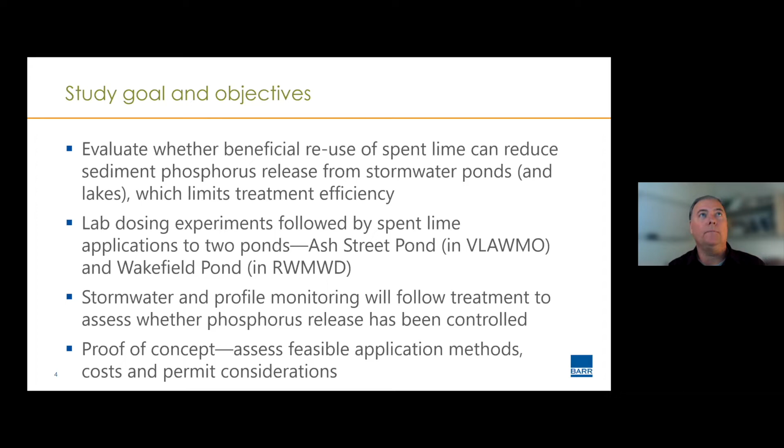So what is spent lime? Well, it actually comes in many different forms, depending on the facility you're talking about. There are several water utilities around the state using lime softening, and usually a byproduct of doing lime softening is that you get what's referred to as spent lime. So the residual after the water treatment process for lime softening results in some form of spent lime.

At their capacity, they're producing about 10,000 gallons of spent lime every day. Over the course of a year, that's about $1 million to truck this filter cake out to agricultural fields where it today is being used as a soil amendment. It would be beneficial in some cases if you needed pH adjustments in your soils. And so that does come with a cost. The water treatment residual has a cost to it in terms of its disposal or some other reuse that would come into play.

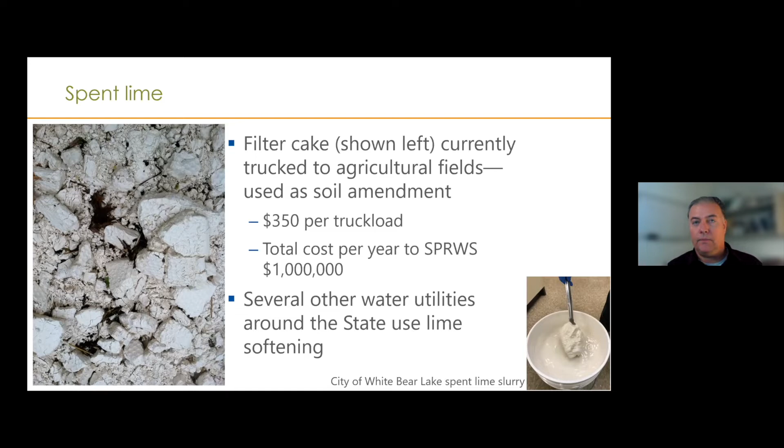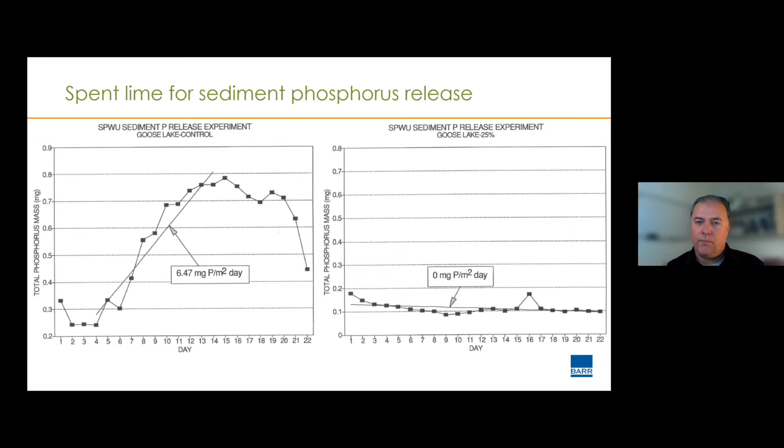We do already pretty much know that spent lime is working for stormwater treatment. There is a filtration facility over by Wakefield Lake in Maplewood, and we monitored inflows and outflows to that filtration facility, and it really was, especially initially, very good at removing the incoming phosphorus from stormwater runoff. And so we knew that the properties were there to potentially tie up this. In this case, we're looking at orthophosphate, the dissolved component of phosphorus that was getting removed by the filtration facility.

So I think the combination of this and the early 90s study of the sediment cores were encouraging for us to try this and try to look at more recently how this might work for us in controlling sediment phosphorus release, and then also identified, I think, the other element to the project that we thought needed to be done, which was to take this out to a field scale level and evaluate how it might be working at that scale.

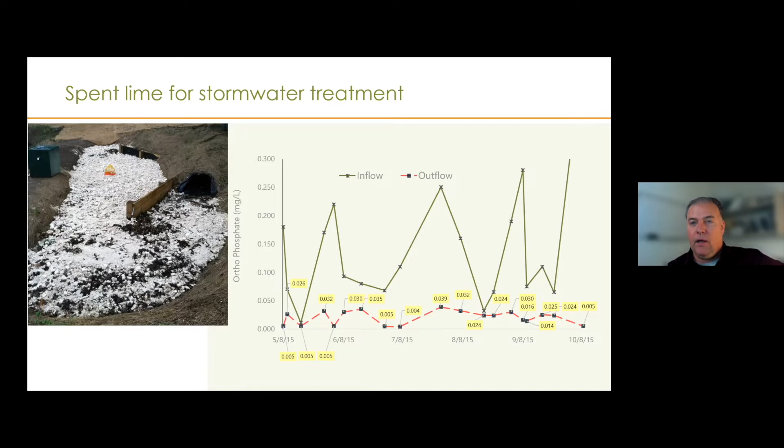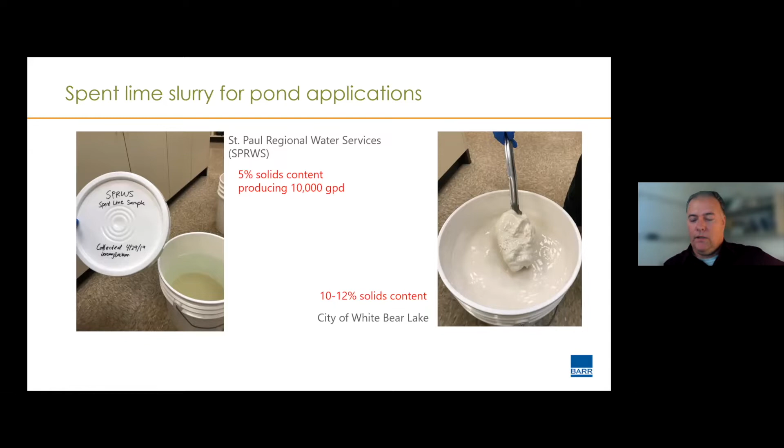And so this provided an idea for us about which source of spent lime we might want to use for the field scale applications. And so I just want to point that out in advance here. And so actually this was 2 years ago that we started to do the sediment core and spent lime lab experiment work. We had collected sediment cores previously from each of the ponds that we were studying. And so we had the results of that, but we wanted to collect new cores and then in the lab composite the sediment material with the spent lime.

In our case, we were looking at the St. Paul Regional Water Services spent lime, and it's very comparable to the water content that's in the sediment as well for both the source of the lime slurry and the individual ponds that we were looking at. Oak Knoll Pond was a pond that we intended to apply the spent lime to, and so we had collected sediment cores from there. And then, like I said, this was done in 2019. This work was done to test this and look at phosphorus fractions attached to the sediment material with and without the spent lime mixtures added in it.

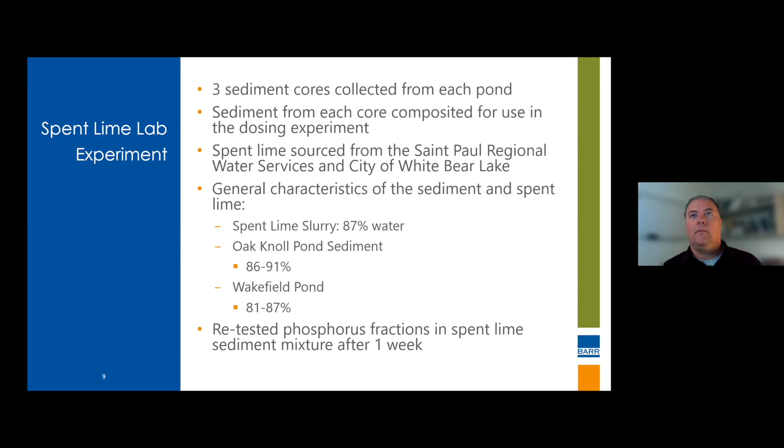So we tried various doses and then retested them after 1 week to look at how the phosphorus fractions had changed with and without the spent lime additions. And so this was done in our lab, like I said, a couple of years ago. Last year was kind of a lost year for us due to the pandemic, and it really wasn't until the beginning of this year that we started to do the field applications.

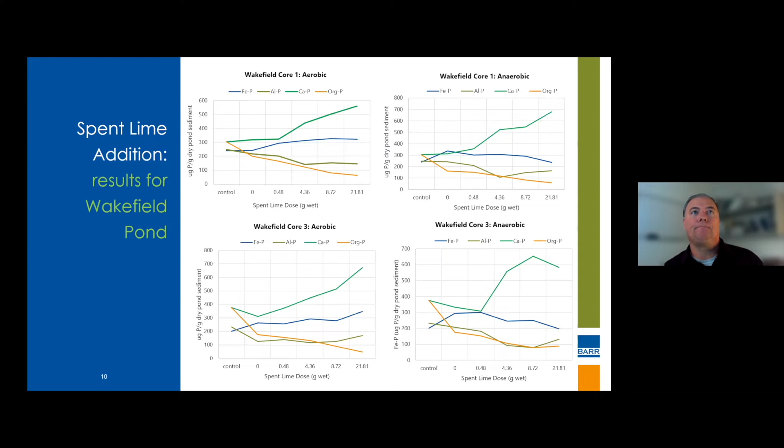The one big consideration we also had to take into account, which our lab work helped with, was to see how each of these respective dosages might change pH in the pond. The spent lime has more of a basic character to it. We knew it would probably increase the pH, and the lab work confirmed that. When we applied at least the highest dose to the sediment cores in the lab, we would get pH levels that would exceed 9, which in Minnesota is the high end of the standard for pH in surface water bodies.

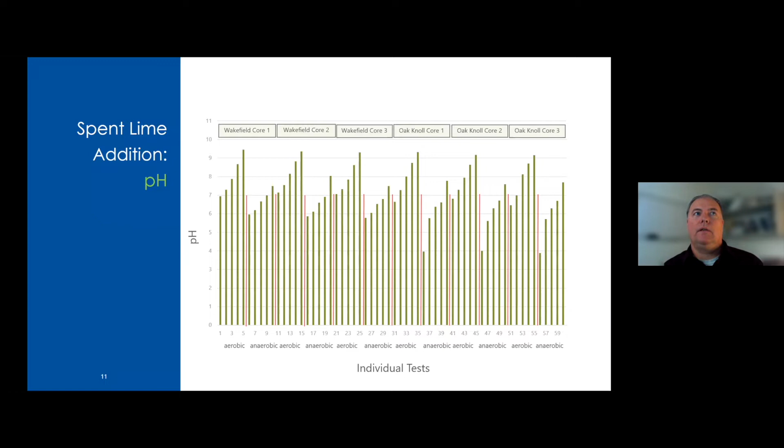So we also thought it was important to look at these results to get an idea of levels that we didn't want to go above, didn't want to have this result in a problem in the field applications. It gave us some sense for the sensitivity of how the lab water was changing in relation to varying doses of spent lime. So this became something that we paid attention to closely in the field.

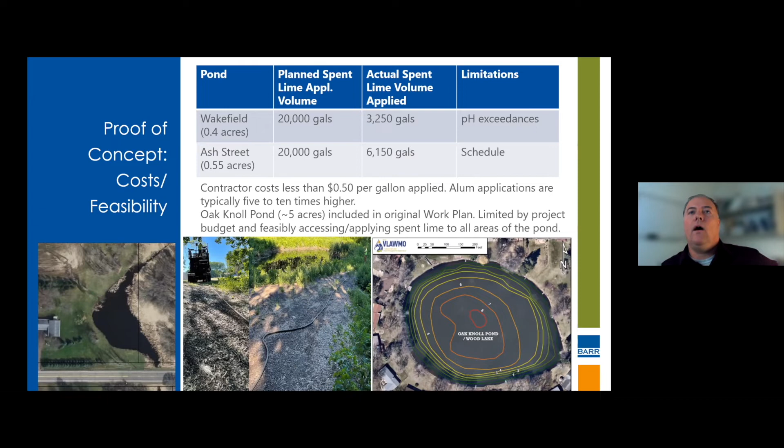The other thing that we did have to navigate along the way here was getting the permit from MPCA, in this case for experimental purposes, to apply the spent lime to each of the 2 water bodies that we used. The relevancy from doing that is really tied into the MS4 permit. And so whether you're dredging or applying spent lime, the soil leaching values or soil reference values become important. And MPCA was comparing data that we had on the filter cake or the lime slurry from our 2 sources. We had data on the various chemicals of concern and how they related to these SRVs or SLVs.

And really what we were able to demonstrate from the analyses that we had from the spent lime from our water treatment process was that we really don't think that there would be any contaminants in that residual that would exceed those levels. And now this wouldn't necessarily be true of all sources of spent lime across the state.

If source water had arsenic in it or some other contaminant, this may or may not satisfy the interest of MPCA as it relates to comparing it to soil reference or soil leaching values in sediment that they are using right now to assess what needs to be done with dredged materials.

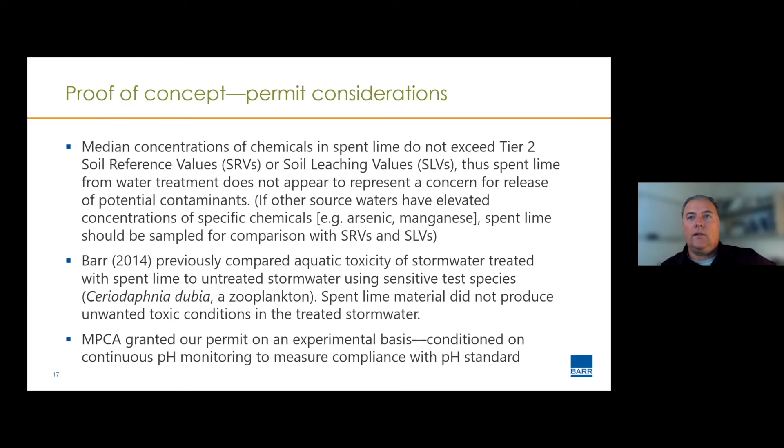So I guess bringing this then, and thinking more about the proof of the concept of spent lime, how would it compare to our other options? So I've made reference a little bit to the dredging materials. In the past, that tended to be what folks would do to maintain their stormwater ponds, is they would dredge. It would provide storage increase and might provide a better long-term solution, especially if the surface of your sediment is enriched with phosphate that could otherwise get released in the summer.

But the main drawback with that, and the reason why you don't see it as much in the stormwater ponds as you might, is that it can be very expensive to dredge material from ponds. We know that, like I talked about before, alum works. Alum is good because it's not sensitive to anoxia. We're comfortable with how it works. We know how to dose it, how to buffer it if we need to in smaller water bodies.

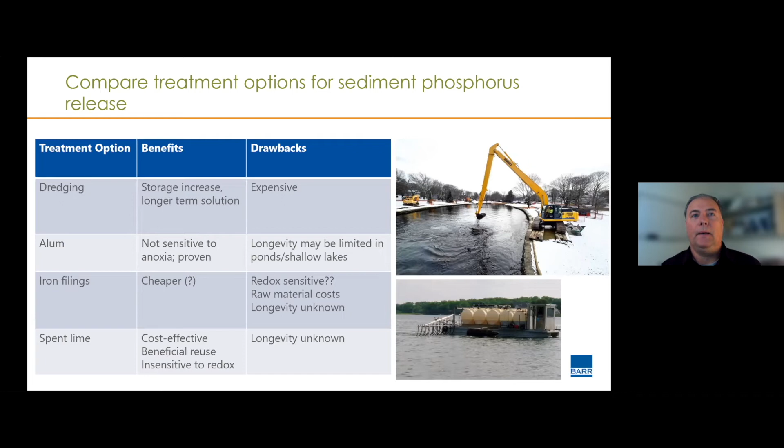And so that kind of leads me to just summarize our conclusions. It isn't totally clear to us if we were able to get calcium phosphate formation. We know that it normally is a slower reaction in terms of tying up phosphate, a chemical reaction in terms of tying up and forming metal phosphate, probably much slower than the aluminum phosphate formation that you would get from an alum treatment.

But the lab tests demonstrate that we were getting phosphorus partitioning into the calcium, and we just don't know for sure if we could correct our results for the mass of calcium applied. We might be able to differentiate that from a real chemical reaction. But we did see in the lab that it was not sensitive to redox.

We do know that we have to mitigate or consider the dose effects in making sure that we don't have pH exceedances in ponds, or if we were to translate this to other larger water bodies, we would definitely want to make sure that we don't have pH increases. We really just see that as being the one place where we could have aquatic toxicity impacts, if we had pH increases.

So then what we concluded from our spent lime applications to the 2 ponds that we made applications in the spring and early summer is that we were very happy with the uniform coverage that we had. It was surprising how quickly it improved transparency after the treatment. Definitely saw that it was removing phosphorus from the water column right away.

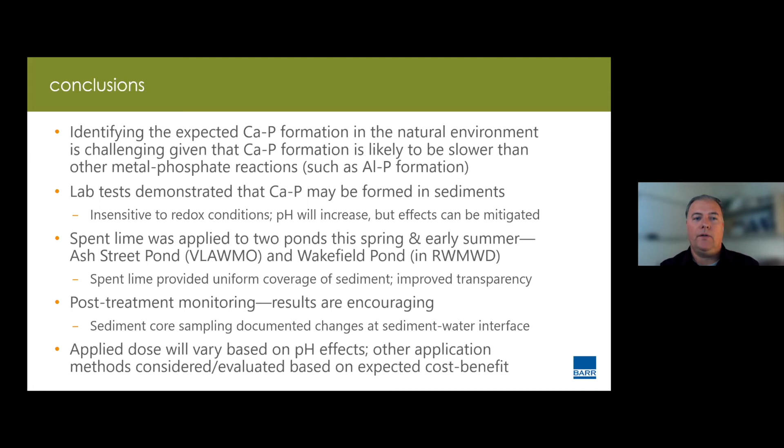And so that leads me to our recommendations: we do think that we need more effectiveness monitoring. Obviously, one summer of results maybe isn't enough to go on. We've got one water body where, because of drought conditions, we had a really good handle on the mass balance, we think. But it would be good to try to capture the variability in more ponds or more water bodies in more situations and circumstances that would vary from one place to the next.

And then the most important thing I think that we need long-term is just better results of how this works long-term. Like I said before, the costs are much lower than what we would expect to pay for something like an alum treatment. And so even if we had to do more frequent applications of spent lime, it could still be cost effective, but it would help us to have longer term results to confirm that. We'd also like to get, as it relates to variability for these various water bodies, better information on how pH effects differ from one place to the next.

We already know, just based on the 2 ponds that we had, that things reacted significantly differently in the 2 water bodies that we looked at. And then we'd like to further develop surrogate measures for how sediment phosphorus release differs in these settings that we're evaluating. And so we think we can further develop that with more effort in the future.

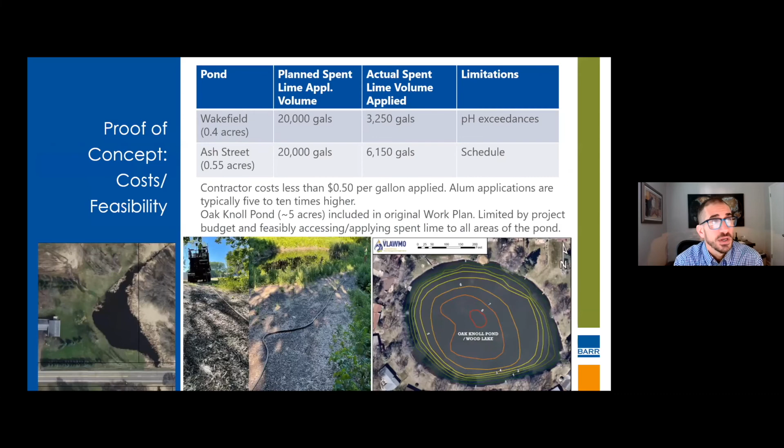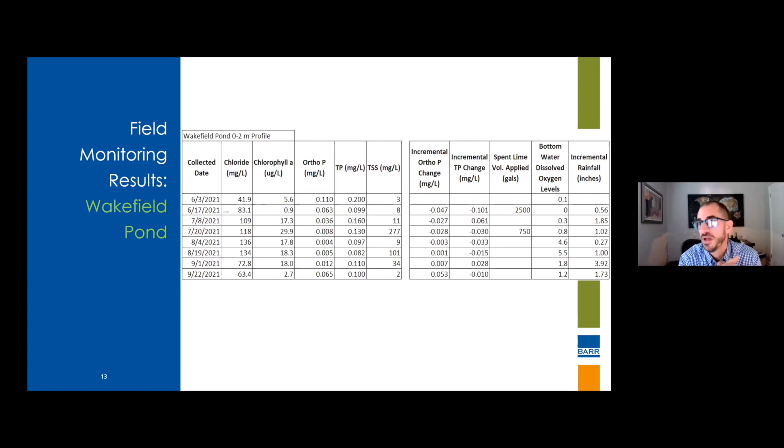Thanks, Greg. We'll just take a couple more questions here. I'm going to combine a couple. Do you anticipate, if we were to continue applications, some sludge or residue would have to eventually be removed? Would we continue to build up? And related to that, your application wasn't what you had hoped for. You were going to apply more, but it amounted to 2 centimeters. Would that have built up to 6 to 8 to 10 centimeters? Any thoughts about build up, and would we have to do removal? Yeah, that's a good question.

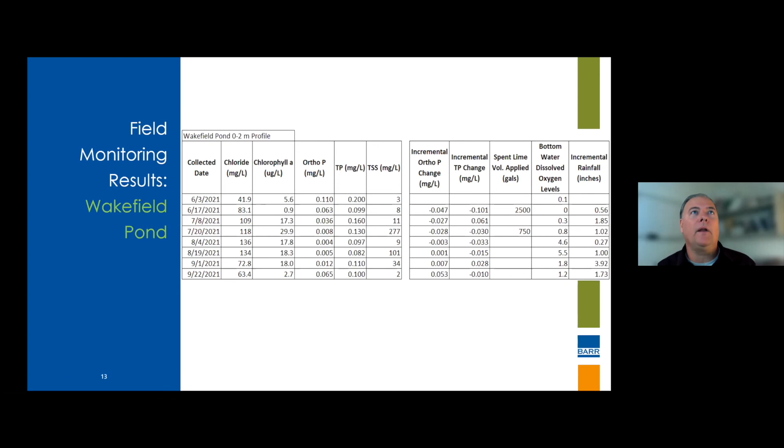So no, but at some point, if a few extra centimeters on the bottom of the pond starts to cut into maybe the treatment design for any individual pond, then yeah, I could see that if you really were going to be doing this quite often, at some point you would just simply want to do some dredging. But I think our hope is that this may be an alternative way, especially in ponds that are over designed.

What we know historically is a lot of these ponds are actually stratifying. So if they're stratifying, they're probably already larger than they needed to be. And in many cases, that's a byproduct of the design that, you know, the Bill Walker NURP design called for sediment storage. And so if we already had that going in, it could be that some of these already have more storage in them than we think they really need for settling of pollutants.